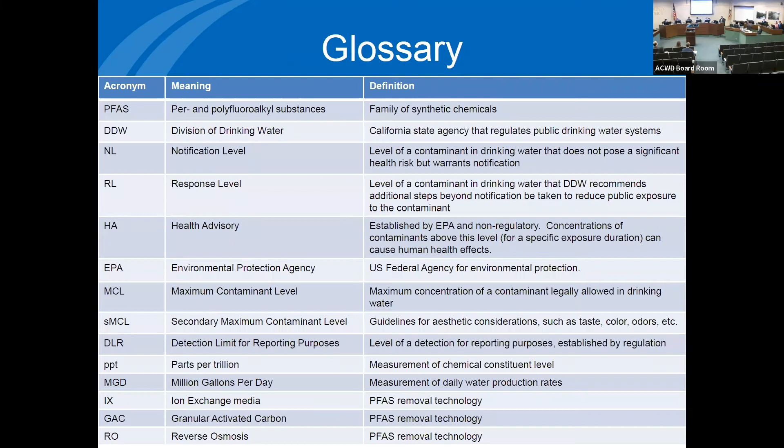Just real quick, I want to review what we have hoped to achieve tonight and some of the objectives of this presentation and the workshop. First, we want to develop an understanding of how PFAS currently affects our operations at ACWD. Then, really key to this discussion, based on potential regulations, how PFAS may affect us in the future, which is what we're trying to anticipate and plan for. We want to share various health-based standards and what it means to exceed those standards and what the risks are going forward, so we can understand both sides of the equation. What staff's approach is in trying to minimize these risks. And finally, lay out a path forward and the next steps for the project. So that's what we hope to achieve.

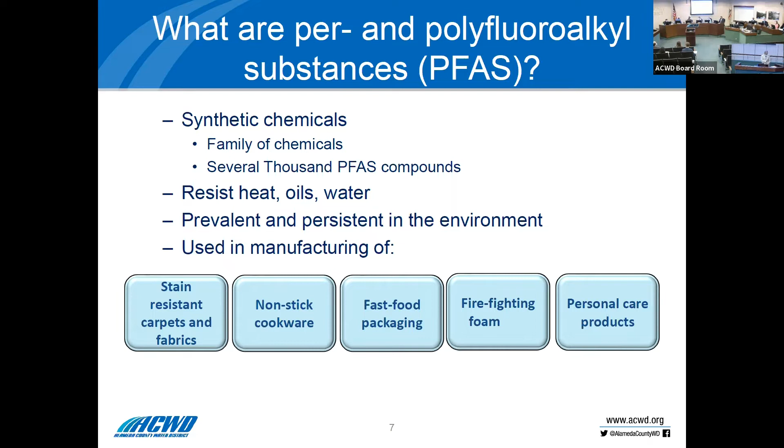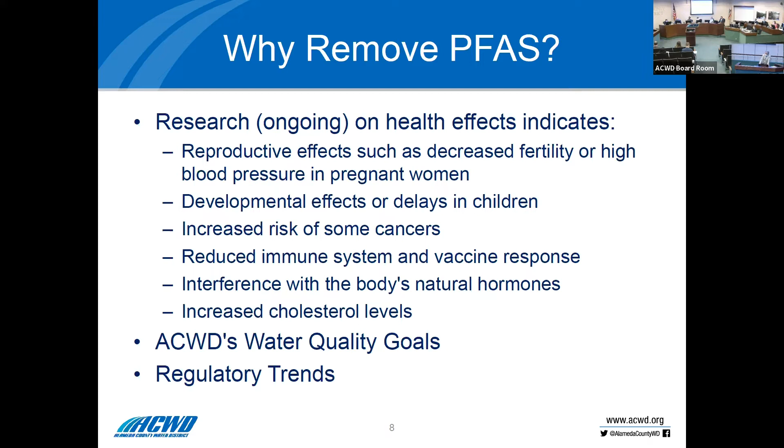The district's mission is to provide a reliable source of high quality drinking water at a reasonable price to our customers. And that includes providing water with contaminant levels below levels which may pose a significant health risk. So it's not only MCL, but anything that has a potential health risk, we prefer not to exceed those.

Our district strategic goal that was laid out, 1.2, is to continue to meet water quality standards 100% of the time. And we meet and surpass all primary and secondary water quality standards. Now, the primary standards are health-based, MCLs in this case. The secondary standards are aesthetic and include odor, taste, total dissolved solids, etc. And we meet all regulatory treatment requirements for treatment and distribution of water at all times.

And the blending facility, which is the focus of our discussion this evening, mostly, is we meet the hardness target of 150 ppm because it's groundwater blended with purchased San Francisco water. So as you can see, we have been carrying forward this mission statement all along with the quality of water we have delivered to our customers.

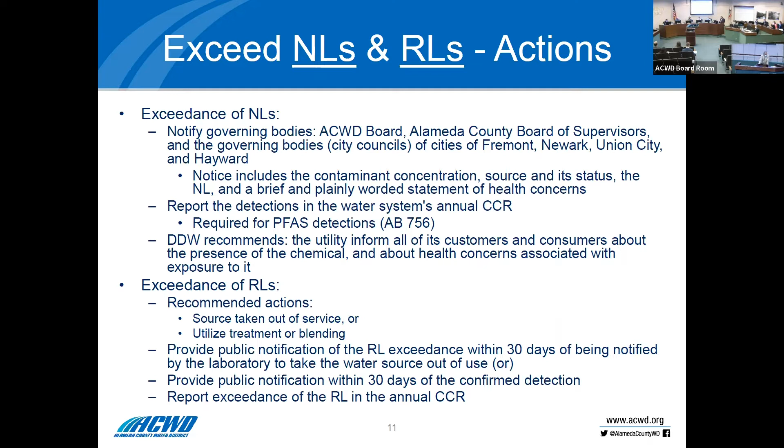So these are the two terms, because currently the PFAS chemicals, in their evolution toward establishing MCLs, these two are the thresholds that have been set by the Division of Drinking Water for 3 PFAS compounds, which are the most prevalent and have been known to have the most detections. And there is a fourth one, PFHxS, which we will also talk about tonight, because the Division of Drinking Water had a discussion yesterday, but Mr. Wickham will talk more about that. But we will also go into the fourth PFAS chemical. Next slide, please.

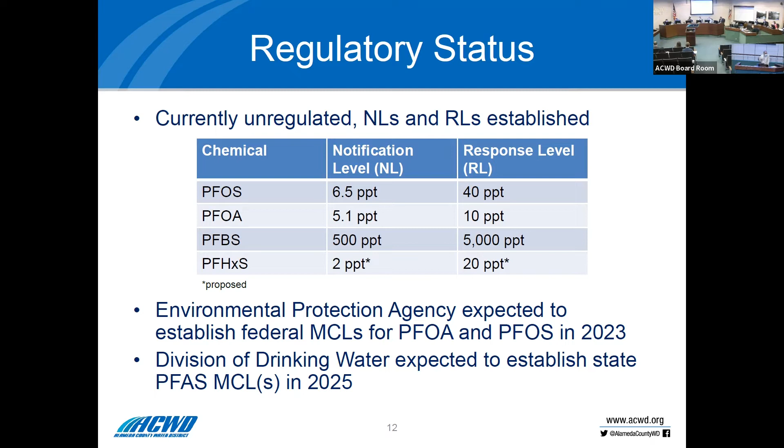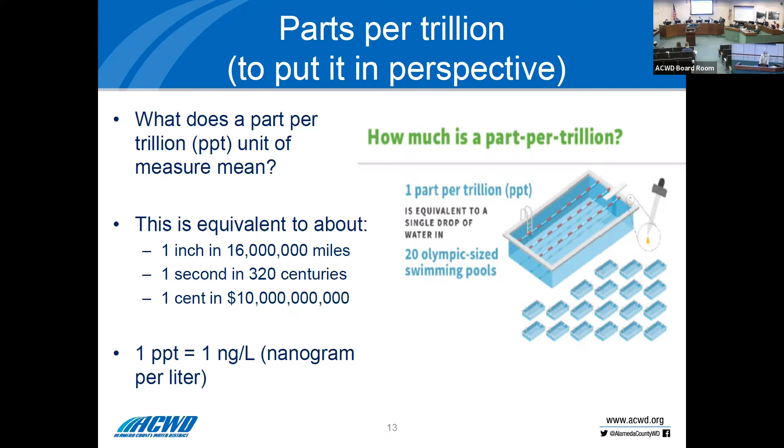But the toxicity studies have demonstrated that even at those low concentrations, like I showed in the previous slides, there are health effects. And that's why, based on those studies, we get these very low numbers. So the takeaway is there are health concerns for these PFAS compounds, the four that have been widely detected, even at very low concentrations. Next slide, please.

With regards to our monitoring program, which I've covered before, I'll just breeze through this. In 2020, the district embarked on a voluntary monitoring program. With the whole attention on PFAS, the Division of Drinking Water had issued monitoring orders for several utilities, both drinking water and wastewater treatment plants. ACWD did not get any monitoring orders, but nevertheless, in light of our mission statement and to be sure that the water we serve is of the highest quality, we began a voluntary monitoring program for PFAS in June 2020, and we've continued it since on a quarterly basis.

Samples are collected at all source wells, the Mowry and the PT well fields, which feed the blender. We also sample the desal supply wells and purchased SFPUC water. Because of our blending facility, we blend groundwater with purchased water, so we want to know what's in the other sources that we purchase. And upon blending and treatment, what's of ultimate importance is what we serve our customers, the distribution system entry points. We also collected samples at our surface water treatment plant, both raw water and finished water.

And every quarter we've been publishing the results on our website, in addition to all the PFAS information that's there for the customer. The good news is, for all the quarters we have sampled, we have always maintained all detections at entry points, what we're serving the customer, below the notification levels. But since there's no treatment yet, that was done by implementing operational strategies. Mr. Wickham will talk more about the operational strategies and the blender production capacities in later slides.

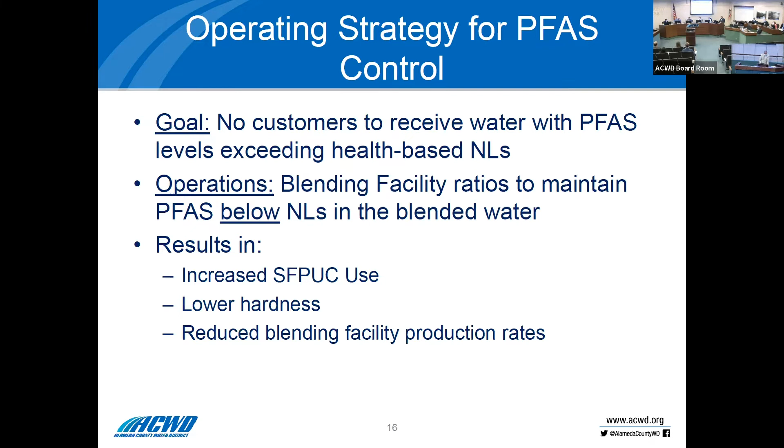With that, that's my section on the background of PFAS and why we are monitoring and what are the issues. If there are any questions, we could take them, or I will turn it over to Mr. Wickham. Questions, members of the board?

Question I have, you had a chart which showed where we have identified PFAS in our system. It showed, oh, we can pull up the chart if you could. It showed non-detect in the Mowry well field. But we did have PFAS in the, oh, sorry. Can you go to the slide? Yes, here we are. So in Mowry 2, non-detect. Mowry, the other wells, we found some. Right. So we have at least one well where there's non-detect. Yes, and thank you, Director Weed.

So if you look at Mowry 1, 3, 4, 6, 7, 8, 9, they are all not screened in the deep aquifer. Mowry 2 is our only well that's screened in the deep aquifer. The good news here is the PFAS, by whatever mechanism, hasn't yet reached the deep aquifer. That's why Mowry 2 has been non-detect. I'd be interested to see a graphic map of where these are located and the concentrations we see in our groundwater basin or our well fields. And might there be other locations in our groundwater basin where there'd be non-detect, where merely relocating our wells would address the issue in the near term?

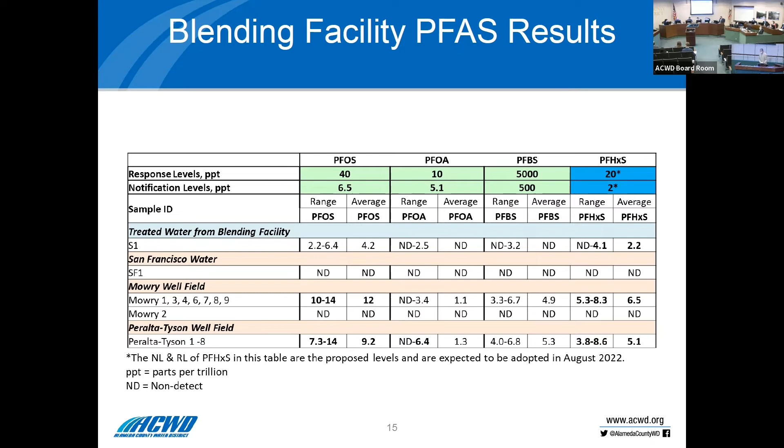Good evening, or good afternoon, actually. So my portion of the presentation will be a recap of the initial project that we came to the board with in January this year. We'll discuss our production impacts, anticipated regulatory activity coming up, a comparison of the regulatory timeline to the blender capacities, then also share how other agencies we've reached out to are responding to their PFAS issues. Advances.

So initially in January, we did come to the board with a project to help restore the blending facility offset production. And that was to identify an interim PFAS treatment system that would treat up to 6 million gallons a day for PFAS removal at the blending facility, and design and do an analysis for the potential implementation by summer of 2023 to restore capacity if feasible.

So the project approach was an accelerated approach to restore production and meet the timeline. And so we did pursue a parallel path. We conducted the water quality analysis portion of the study basically in parallel with some of the design components for the long lead time items like the pressure vessels. And to support that project, the board authorized an agreement with Trussell Technologies for the PFAS study at the groundwater facilities. And then next slide.

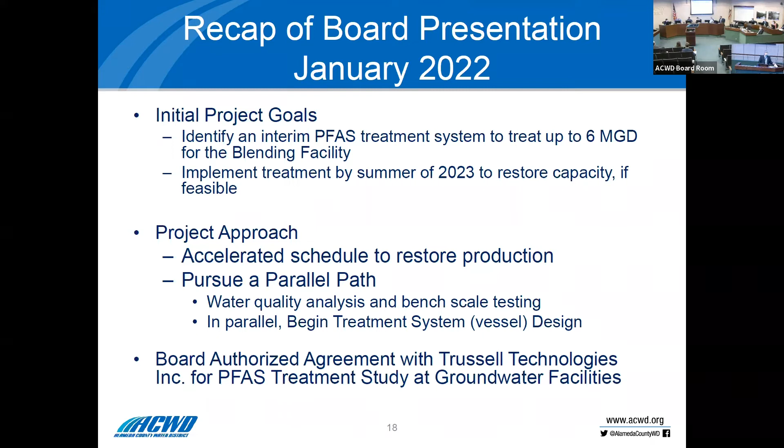Perfect. So some of the developments since we came in January: again, that 6 MGD was basically to help us operate and maintain below notification levels. And the initial goal was to have it installed and in operation before MCLs were in effect, to essentially buy the district whatever time it needed to make the larger decisions it might need to make. Since January of 2022, there's been a few significant developments.

The largest one is that the Division of Drinking Water has proposed, and they heard the informational item just yesterday at their board meeting, and there was no commentary on it, so our assumption is that this will be adopted, a 2 part per trillion notification level for the PFAS compound PFHxS, and the corresponding response level of 20 parts per trillion. That notification level is a bit of a challenge for us.

So remember from Mr. Sampath's slide with our monitoring results, our average concentration in our groundwater basins due to the blending facility was about twice the notification level for PFOS. They are 3 to 4 times this new proposed notification level for PFHxS. So that does have an impact on us. But additionally, it may have some impact on our desalination facility as well due to the levels in our Cedar 2 well, but that's outside of the scope of this project.

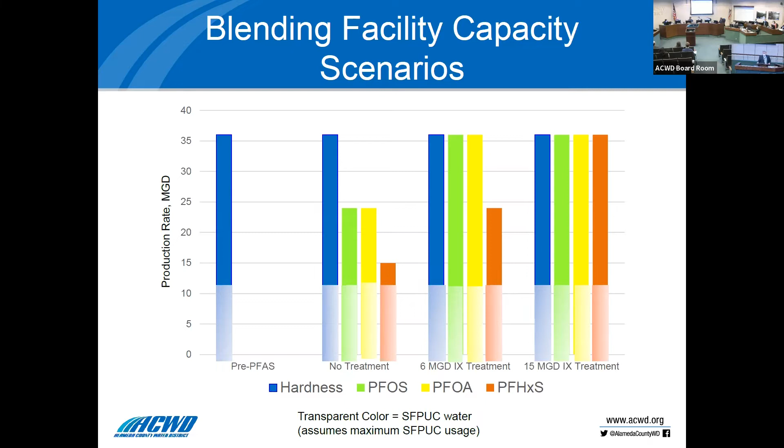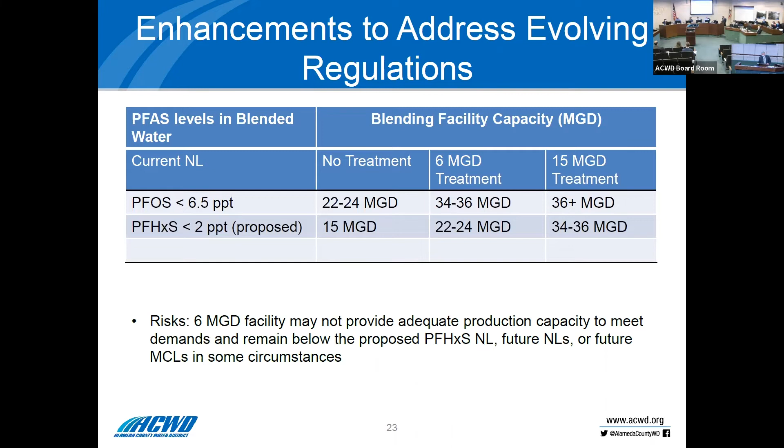All right, so the regulatory capacities and the timelines. So again, August 2019 is when the notification levels were lowered for PFOS and PFOA. Before our discovery and monitoring for PFAS, we were operating the blending facility up to about 34 to 36 MGD. I guess I'll just go across the top. So then in this August, so actually yesterday, PFHxS notification level of 2 parts per trillion likely to be established. We do not yet know what month that will actually be published.

And then in fall 2023, we're expecting the EPA to have final MCLs for PFOS and PFOA. And then in 2025, when state MCLs are expected. We have PFOA and PFOS up there, but our recent communication with them indicates that they're looking at regulating PFAS by class. So a lot of this is going to be dependent probably on what they discover during their studies, looking for correlations in the analytical methods to be able to test for it by those groups.

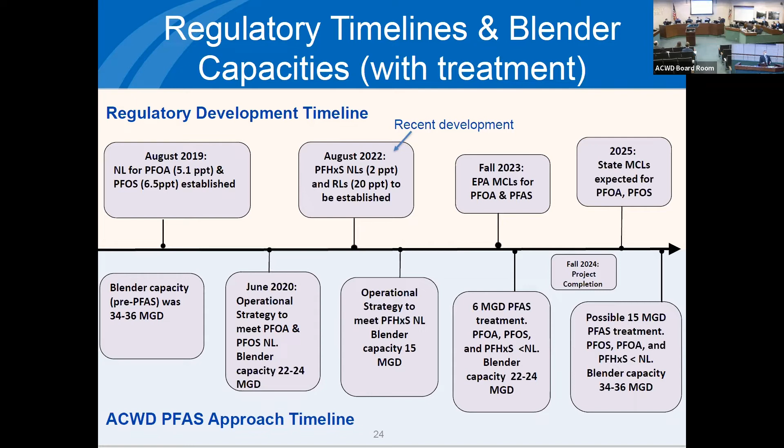And then along the bottom, again, in June 2020, we implemented our operational strategy to remain below notification levels for PFOS and PFOA that limited our capacity to about 22 to 24 MGD. When this new notification level is established, to remain below it, our blending facility capacity will be approximately 15 MGD. If 6 MGD of treatment is constructed, it brings us back up to 22 to 24, remaining below the notification level. And potentially in the future, if we expand that treatment, then our capacity of the blender will increase.

And then what are other agencies doing? So we did reach out to several agencies, and each agency developed their approach to PFAS wholly dependent, I guess, on their individual situation. So many agencies had PFAS levels that were higher than ours, like above the response level for some of their wells. We are fortunate, or at least somewhat unique, in that our PFAS levels are low. They're below the response level and just a little above the notification levels. And we have the capacity to blend to remain below. So we're kind of different from many agencies.

So again, many agencies had higher levels than us, and that pushed them towards treatment. Other agencies like ours had options which let them provide water below the NLs to their customers. Several agencies didn't have those options prior to installation of treatment and have started down the path of designing and/or installing PFAS treatment. And they're currently delivering water with PFAS levels above the notification level and below the response levels, essentially out of necessity. Water quality and operational managers have spoken with other agencies. All of them have indicated their treatment goals for water delivered to their customers is below detection or below the notification levels.

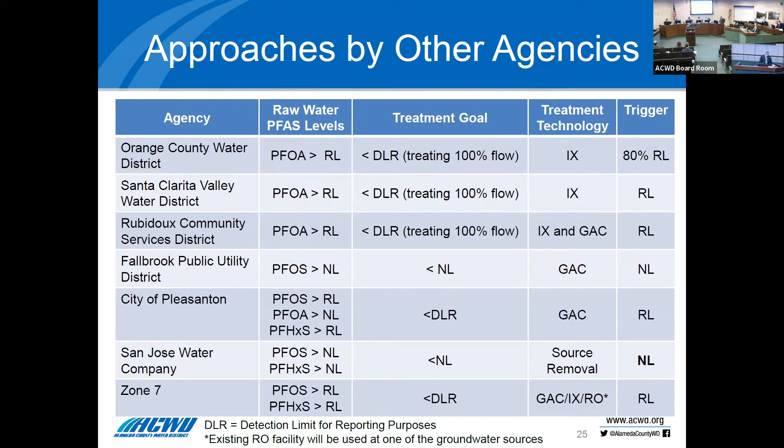So with that, that's the end of my section, so I'll pause for questions. Are there any comments by other members of staff on this? And bring it to the board. Are there questions on the part of the board? Director Gunther and I already had our questions answered a couple of weeks ago.

Yeah. My questions relate to, first of all, what is our current detection limit and where do we see that going? So the current detection limit we can detect is 2 parts per trillion. The question of where do we see that going? I'm going to look to Ms. Darby from Trussell. Do you have any indication of that going?

Yeah. So the detection limit is a little bit lower than 2, but the lab reporting limit, the minimum limit that they can reliably detect, is 2 parts per trillion. This changed about 5 years or so ago from a higher limit, so it's possible that the methods will improve to get lower detection limits in the future. But I haven't seen movement in that too rapidly. So we have the ability to do a 2 ppt detection at this time? Yes, sir, we do.

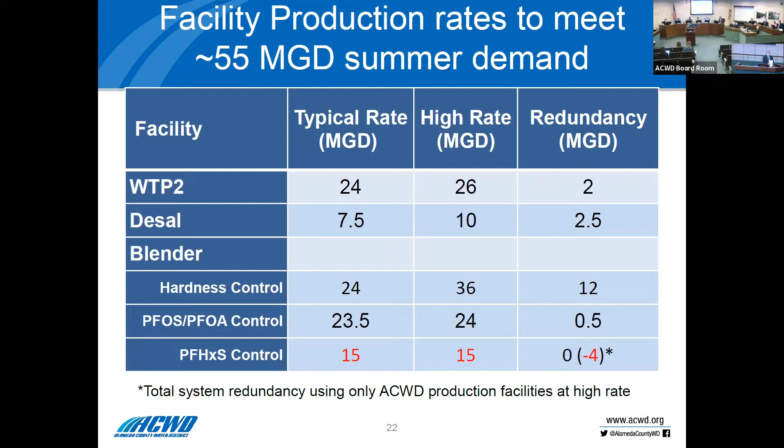Yeah. Just as a process check, where are we in the presentation for tonight? I think we've got a ways to go. We're about halfway, sir. On section 204, around halfway. All right, thank you. You're welcome. So with that, I will turn it over to Dr. Pexon and Ms. Darby from Trussell Technologies.

Good afternoon. In this next section, we're going to talk about the water quality evaluation and its impact on the selection of technologies for treating this water to remove PFAS. Okay, thanks. So on this next slide, what we're looking at here is your existing groundwater quality. This is part of a table that we put together from a tech memo to review and summarize your water quality data. What this table is focusing on is parameters that could impact the performance of some of your treatment options like GAC, granular activated carbon, and ion exchange.

What we're seeing in this table is that we're generally finding a lot of these constituents at low levels that we think would not impact the media-based technologies like GAC and IX. You can imagine other charged species like nitrate and sulfate could also potentially bind to these resins and compete with the PFAS compounds, but we're finding them at low concentrations. I wanted to point out as well that the TOC, total organic carbon, is gratefully at a low level as well, lower than the levels that we see in Southern California, which also bodes well for these media-based technologies.

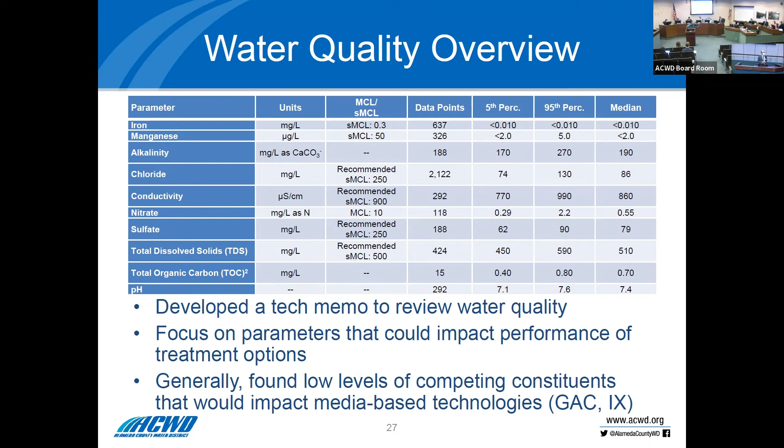So if we go to the next slide, those are the water quality constituents that could impact treatment. Here's some of the data that Mr. Sampath and Mr. Wickham talked about from your monitoring program. We're focusing now on the PFAS compounds. Remember, you looked at 18 different PFAS compounds through that testing. 7 of those compounds showed up above the detection limit, and that's what we're showing in this table. Just to recap, the ones that already have established notification levels and response levels are 3 of them: PFOA, PFOS, and PFBS.

There's a 4th, PFHxS, that has a proposed NL and RL. And what we're highlighting here in the red bars is that 2 of these constituents that have NLs and RLs were detected above the notification level. So PFHxS and PFOS are detected above this. And so if you want to continue with this goal of producing a water that's below the notification level, then some form of treatment is going to be required.

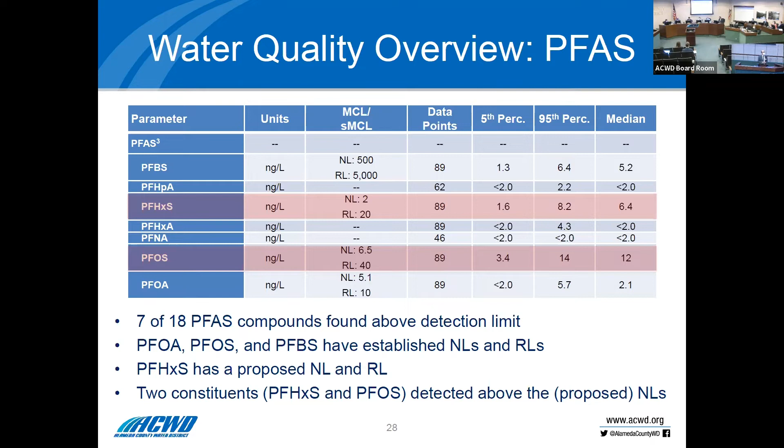So what are our options? On the next slide, as Mr. Wickham said before, there's 3 technologies that are identified as best available technologies by the EPA: GAC, IX, and RO. Of these, the first 2, GAC and IX, are more prone to be impacted by site-specific conditions of your water. RO has been shown to provide really excellent protection kind of regardless of water quality.

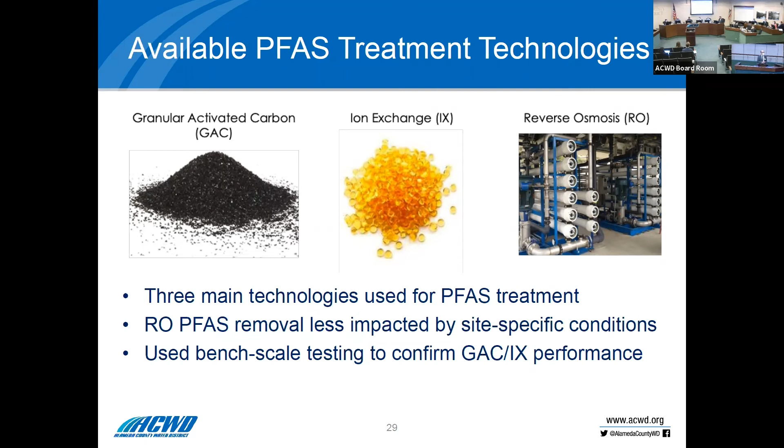And so one thing that we can do to understand how well these technologies would work for your specific water is to do some bench scale testing to confirm that they're actually going to perform well and be good choices for you. And so on the next slide, that bench scale testing, what that actually is, is this rapid small scale column testing, or RSSCT.

So when we think about your full scale operations, you have these pressure vessels that get loaded with media, and you put water over them over a long time period, perhaps a year it might take for the constituent. It gets adsorbed and eventually it fills up the whole media bed and then it comes out the backside. And so if you want to compare the performance of these different media at full scale, it would take a long time to do this. So that's not a feasible option for a lot of people who need to make some decisions quickly.

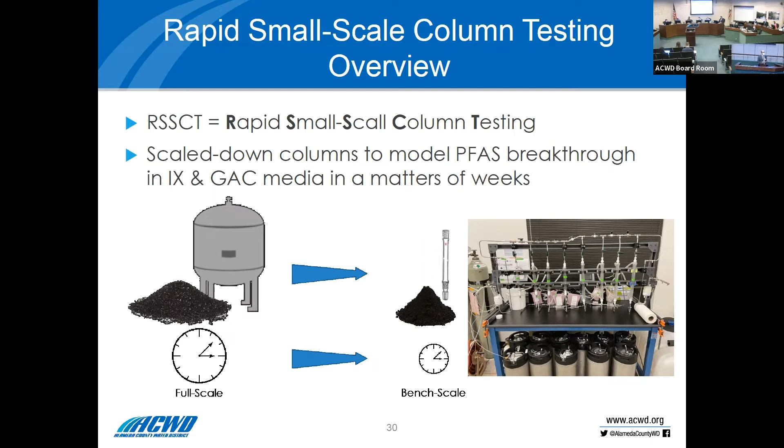So instead what we use are these scaled down columns, just these glass columns that I'm showing in the bottom right. You load them with exactly the same media that you would use at full scale. And then we put your specific water quality, your groundwater, on top of these columns. And what they can do is provide us information in a matter of weeks rather than years regarding the performance of these different media. So in the next slide, I'm going to pass to my colleague, Ms. Darby, to walk through some of the findings of this testing.

Okay, thank you. So here I'm going to show the results from the RSSCT testing. We tested 3 ion exchange resins and 2 GAC media that were all media that performed well at other testing in California and are NSF 61 certified. So I'm going to orient you a little bit to this plot. So this is a breakthrough curve. And so on the left side, the y-axis is the concentration of the PFAS compound. We measured all 18 PFAS compounds that are in EPA 537.1. 7 of these were detected in the groundwater, and then all of them were removed to levels below the detection limit by using the GAC or ion exchange resin.

And so the concentration that we measured in the effluent from each of the columns is shown on that y-axis. Then on the x-axis is the number of bed volumes that have been treated. A bed volume is the amount of volume of media in the column. So this is typically how you measure the throughput for a column, is how many bed volumes have been treated. These bed volumes on this small scale RSSCT column are directly transferable to a full scale column. And you can do a conversion of how many days of full scale operation this would be by multiplying by the empty bed contact time. So you can see that equivalent days of full scale operation on the top x-axis.

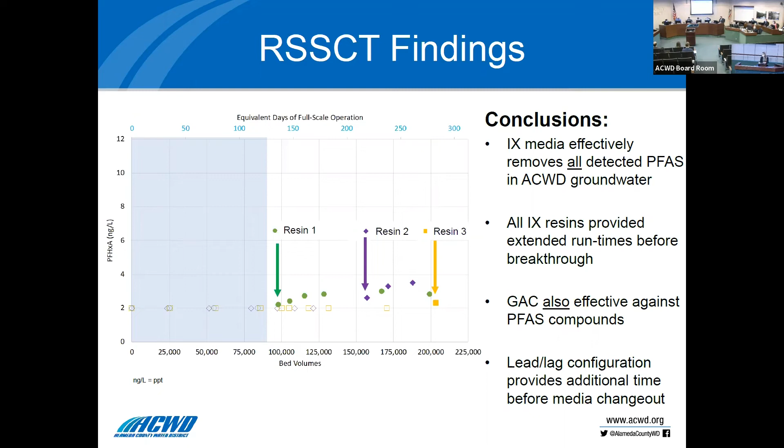So using the results from this rapid small scale column testing, we did an alternatives evaluation comparing ion exchange, GAC, and RO. We developed a preliminary design for each of these 3 alternatives, a layout and a cost estimate, and then evaluated these 3 alternatives based on these 6 criteria: cost, operability and safety, aesthetics, future proofing, feasibility for long-term expansion, and timeline. And based on this evaluation, we decided with ACWD that ion exchange was going to be the preferred alternative for this interim treatment system.

And that is because ion exchange had the lowest cost per acre foot of the 3 technologies, with a cost of around $200 to $300 per acre foot. In terms of operability and safety, ion exchange is relatively easy to operate and maintain with no continuous waste stream. Unlike RO, you're not generating a brine. Instead, the PFAS is adsorbing to the resin, and after about a year and a half, when your media has become exhausted, the vendor comes out and replaces that media.

There's also no regular chemical input for ion exchange. It has a high turndown ratio, so a high ratio of the high flow rate to the low flow rate, which gives flexibility for operations. And it has a minimal flush period when you start up a train after exchanging the media every 1.5 years.

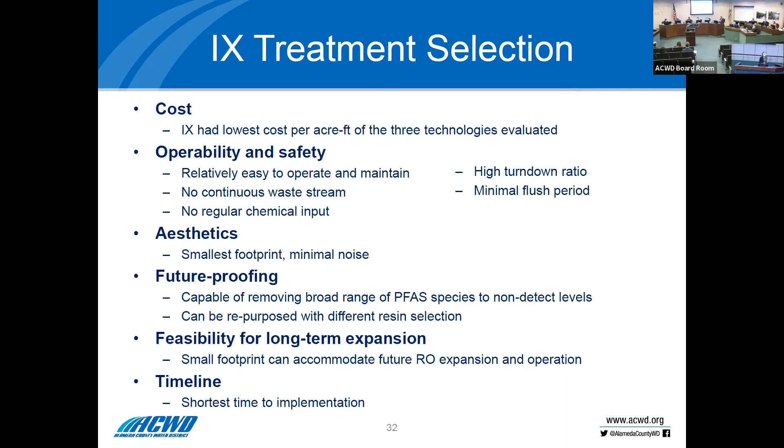In terms of feasibility for goals to put in future RO, the ion exchange system has a small footprint, so it allows that space for a future RO system for hardness removal. And in terms of timeline, of the 3 alternatives looked at, ion exchange, GAC, and RO, ion exchange has the shortest timeline for implementation. So based on these reasons, the district has decided that an ion exchange system meets these goals best. And on the next slide, I'm going to talk about some of the environmental considerations of this system.

So while ion exchange has been shown to be effective at removing PFAS to non-detect levels in the water, we want to think about the environmental considerations of this treatment as well. So one of the things to think about is the disposal of the waste media. Every year and a half or so, you have to replace the media that has absorbed the PFAS with a fresh bed of resin. To do this, the vendor is going to come out and remove that media and replace it with a fresh bed of resin. And then they will take that media away and dispose of it safely.

There's a few different disposal options. You can do incineration or landfill. We recommend going with a hazardous waste landfill because of the potential that PFAS will in the future be categorized as a hazardous waste. This option is going to have the least risk for the district. Okay, so that's the spent media.

Then there's also the liquid waste that we have to think about. There really isn't a continuous waste stream for this system. The only time that we're disposing of a liquid waste is when we're first starting up that resin after we put in a new bed. So every year and a half, when we put in that new bed, we will need to flush it. And it's just for a few bed volumes because the vendor will already flush it for about 20 to 40 bed volumes to make sure that any potential contaminants like nitrosamines are removed and to stabilize the chloride and pH. So once we get it to the field, flushing it is really mostly precautionary.

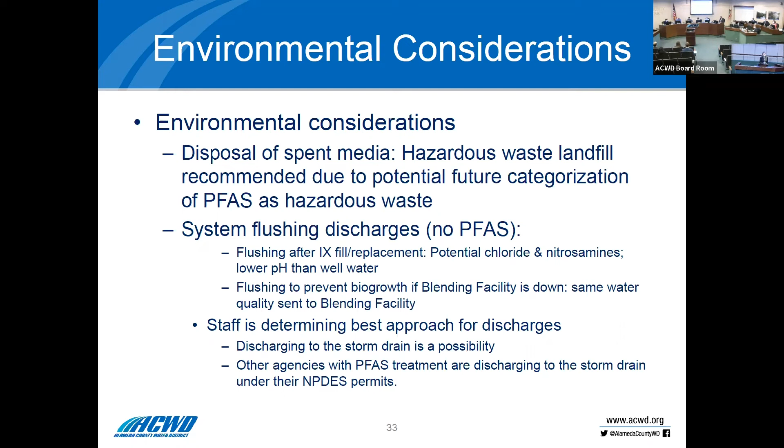Okay, so those are the environmental considerations. It really isn't the same problems that we encounter with RO where we have that continuous waste stream. This is more managed with what vendors do of disposal of the spent media. Okay, so I think that is the end of this section, so I'll pause for questions. Thank you. Any comments from staff? Not from the board. Do any members of the board have a question or comment?

Question I have, did you develop a cost matrix for the options on capital and operation costs for the other alternatives? Yeah, so we developed a class 5 cost estimate for each of the 3 alternatives. So a class 5 cost estimate does have an uncertainty range of about -50% to +100%. But based on that estimate, GAC and IX are both similar cost of about $200 to $300 per acre foot, while RO was about 3 times higher, both in terms of capital cost and operating cost. And so around $600 to $900 per acre foot.

That chart would be helpful, just so we have it for our records. Yeah, it's here in the presentation a little bit later. Oh, I'm sorry. Okay. Next, on our media, the ion exchange resin. Are they proprietary resins or are they on the general market? They are proprietary resins. There are different vendors though that make these. So you will be able to do a competitive bid. There's multiple vendors that make these ion exchange resins that are effective at PFAS removal.

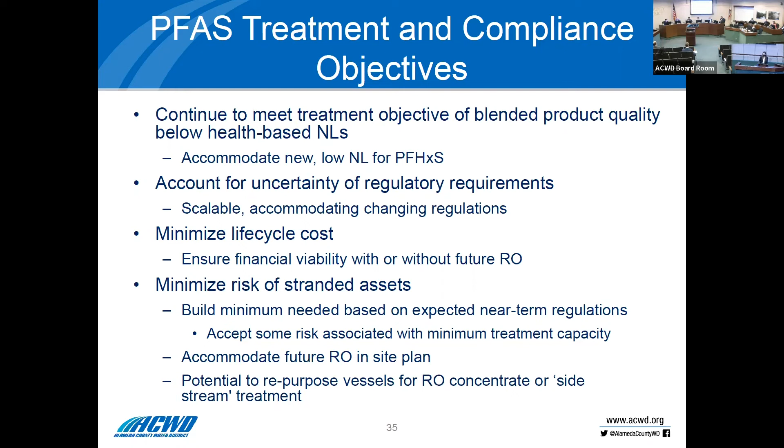An IX treatment facility will provide a cost-effective solution to the district's PFAS treatment and compliance objectives. We will design a 15 MGD facility, but we will have the flexibility to start with constructing just 6 MGD initially, and we can expand that as needed based on future regulations. This phased approach minimizes the risk of stranded assets, and we can accelerate construction of the 6 MGD facility, expanding as needed. This phased approach will also help us with near-term compliance of the PFAS regulations while working on a potential future RO facility, which would take significantly longer to implement.

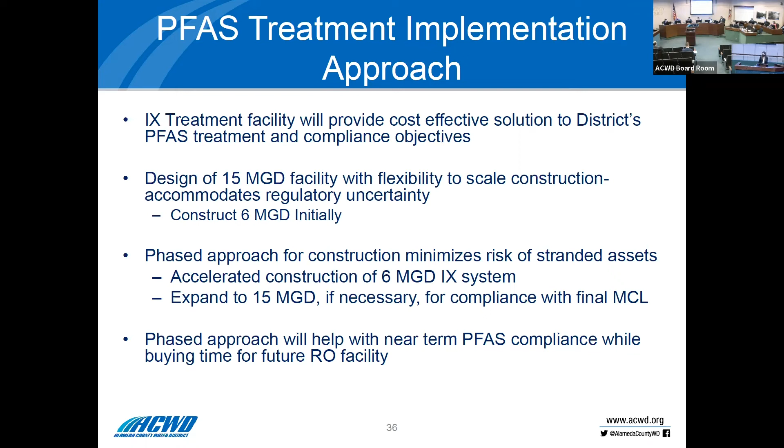The treatment system schematic is shown on this slide. The project would treat water from both the PT and Mowry well fields. Any water produced by the wells in excess of what needs to be treated for PFAS to meet production goals of the blending facility can bypass treatment. Water to be treated will first pass through feed pumps with variable frequency drives. These will control for the flow as well as boost the pressure as needed to overcome the head loss through the treatment system. Next, the water will pass through cartridge filters for particulate removal. The ion exchange media cannot be backwashed, so this is why we need to remove the particulate matter before the water enters the ion exchange vessels.

Next, the water will go through the ion exchange vessels. The number of trains varies with the capacity of the system. 7 trains would be needed for 15 MGD, 3 would be needed for 6 MGD. Each train will have 2 vessels in a lead-lag configuration. Finally, the water will then go through booster pumps to be boosted back up to distribution system pressure as needed, or it will recombine with any bypass water and enter the blending facility.

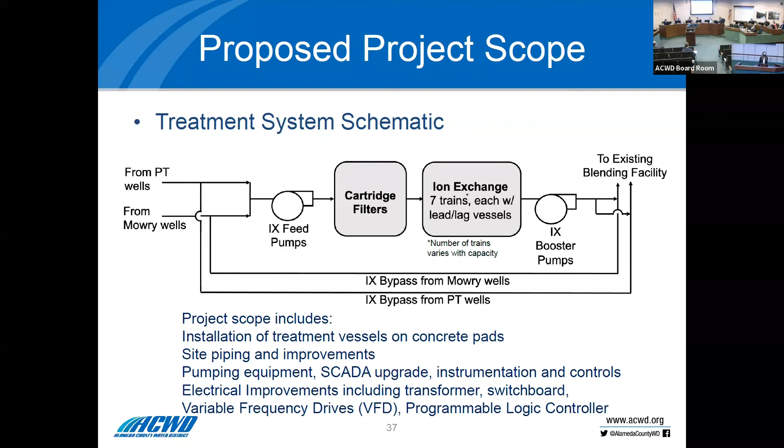Just a note here as well, in addition to the number of trains, all of the other elements would have to be scaled depending on the size of the project, the number of pumps, the number of cartridge filters, etc. In addition to what's shown in the schematic, the project scope includes installation of concrete pads, site piping and improvements, SCADA upgrade, instrumentation and controls, and electrical improvements.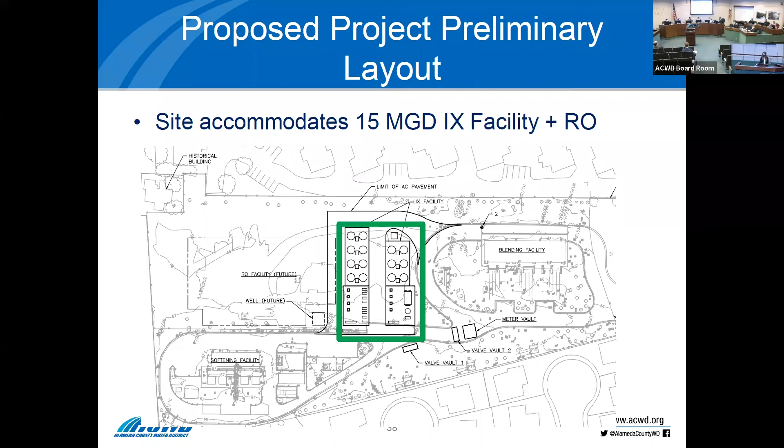Here we show the preliminary layout of the proposed project. There is room for the proposed project on the existing blending facility property. We have outlined in green here the footprint of a 15 MGD facility. See, it fits, with our existing blending facility shown there to the right. And there is still room, even with the 15 MGD facility, for an RO facility on site, now outlined here in green to the left.

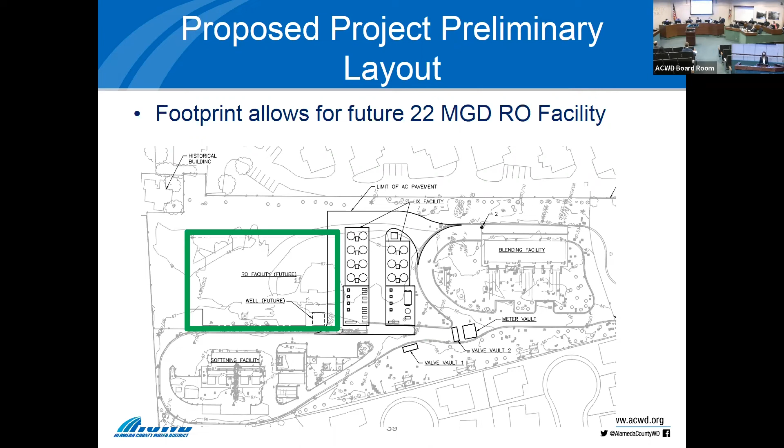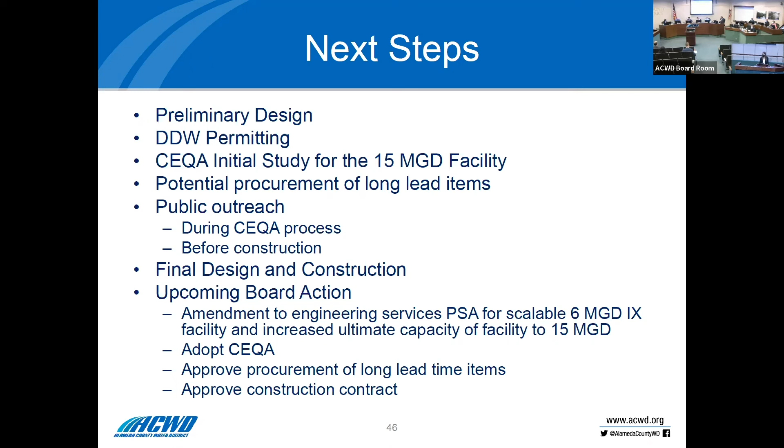So that concludes tonight's presentation. Thank you all for your attention. We went through what PFAS are and regulatory issues around PFAS, the district's water quality and operations, our alternatives evaluation, and our proposed project. We would now like to open it up if there are any questions, comments or discussion. Questions by staff?

If not, let me ask the board and then we'll take it to the public. Director Sethy? I've got two quick comments. Can you go back to slide 43 and 44? Let's see, one earlier slide. And let's go one. Okay, it's slide 40. Slide 41.

So I would just ask that as we take a look at the energy costs on a system like this, and we're not even forecasting the rate increases by PG&E in here, that this may be a really good opportunity to take a look at the Bloom fuel cells, because we have the footprint there. And it might be just a good opportunity to see if it would make sense. I doubt that solar would on that site, but Bloom has a whole new commercial program that just went into effect this last year.

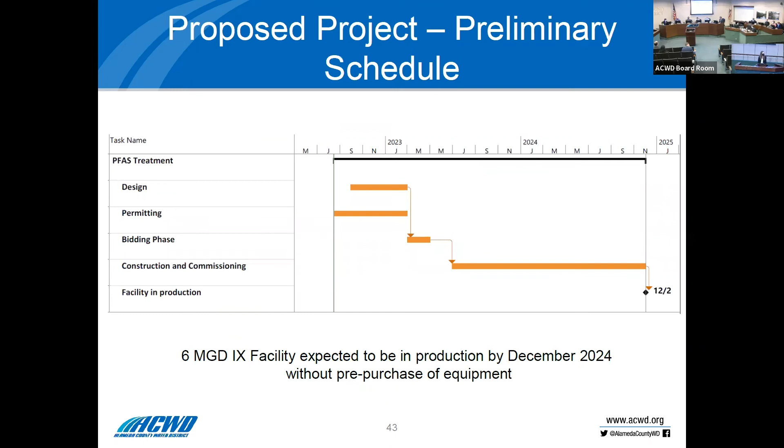Next one. There was something here. Oh, right here. How many of these components are coming from overseas suppliers, if any? What's domestically produced? Yeah, so the vessels can be produced in the US. I'm not sure where the other components are coming from. But the vessels are a US manufacturer plus the resins? So some of the resin vendors are in the US and others are not.

And have you factored in the backup supplies that we would need just on a contingency basis? Factored in the cost of that? So for the resins, there's two factors here. One is they are changed out only every year and a half, and there's monitoring ports throughout the vessels. So you'll get some heads up of when you're going to need to replace the resin. And that does provide sufficient time for contacting the vendor and getting some more shipment of resin. Right now, the lead time for resin is not long, on the order of a few months. And that's for a new contract.

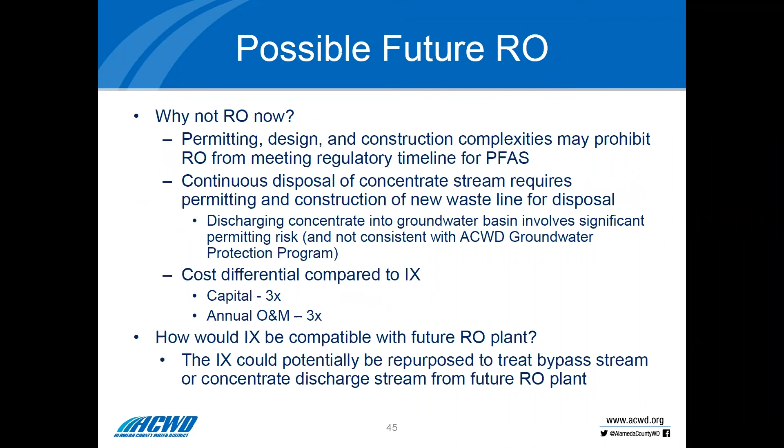Yes, so maybe we'll start with Director Sethy's page 41. I just wanted to make sure I understand the information presented about the energy. The table entry is average annual energy demand, but the unit's horsepower. Horsepower is a unit of power, not energy. I assume what was intended to be published there for the 6 MGD system is 90 kilowatts, converting horsepower at 746 watts, and that the average annual energy consumption therefore will be 745 megawatt hours. So I just wanted to confirm that.

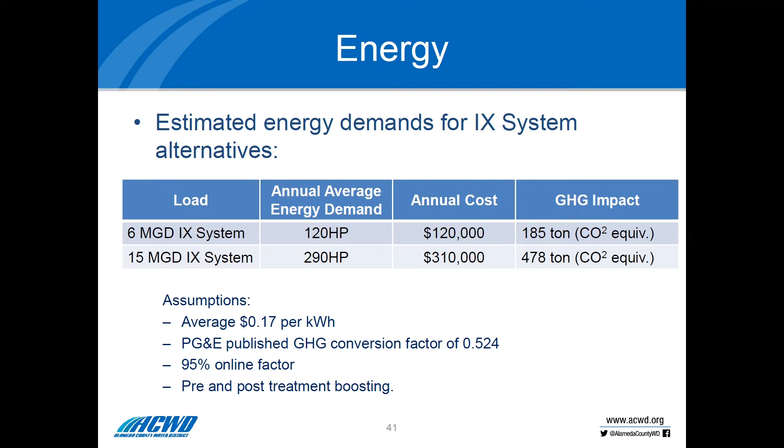And then to Director Huang's comment about the cost, if you go back up one slide to slide 40, looking at the table, is it correct to assume that the marginal cost of producing water is roughly $900,000 to produce 6 million gallons a day for 1 year at 95% duty cycle? If that's the case, I believe 6 million gallons a day at 95% duty cycle or duty factor is 6,385 acre feet, which works out to be about $133 per acre foot.

If I add the notional, and I say notional, cost of groundwater at $500 an acre foot, which is the groundwater replenishment rate in effect right now, that means the marginal cost of producing an acre foot of water from this facility is $633, which is less than 1/3 the cost of the $2,100 an acre foot that we are paying SFPUC for the quote unquote low PFAS water. So I just wanted to confirm that.

And the last question or comment I have, I think, goes to Director Gunther's concern. This was actually part 2 of my previous question, which we didn't get to: are there any technologies to regenerate the ion exchange? In the case of domestic water softening, which is a cation exchange, as I believe the respondent alluded to, one would regenerate it in situ with a strong solution of the desired cation. So in domestic water softening, you are substituting sodium for calcium and magnesium, and when the ion exchange resin is spent, you would basically soak it in brine, sodium chloride, and regenerate it.

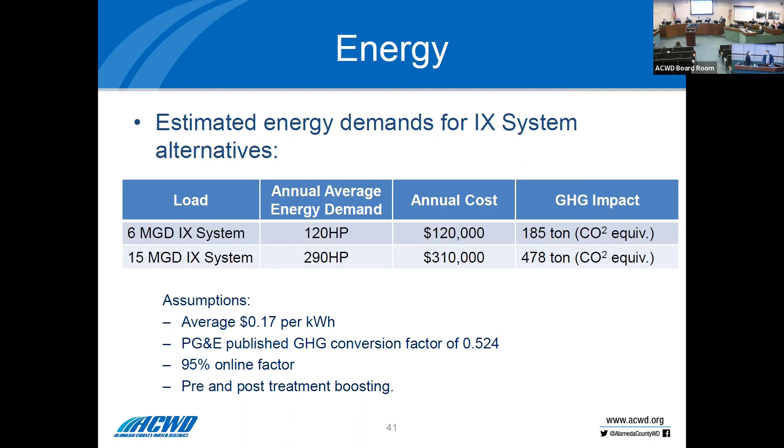And then we also provided there under the assumptions the online factor. So there's an online factor of 95% on top of that energy demand, and that will bring you out to that annual cost. So hopefully that helps explain the numbers you're seeing there. And then I'll turn it over to Ms. Derby to talk about the second 2 questions, which were the cost per acre foot, confirmation of that, and then a question about IX regeneration.

Thanks. So in terms of the cost per acre foot, the cost per acre foot for the added IX treatment is going to be a sum of the annual O&M cost. That includes maintenance, replacement of the resin, energy. And so that is this $900,000, which you then calculated was $133 per acre foot with a 95% online factor.

We then add that to taking this capital cost, assuming a 30-year loan and a 3% interest rate, to calculate an annual cost for that. And so we add those together, and that's where we got the $200 to $300 per acre foot. And so that's for the IX treatment, and this would be added on top of the rates for the blending facility.

The second question was about whether the IX resin can be regenerated offsite. Right now, there's no cost-effective way to regenerate it offsite. There may be in the future, but the difference between PFAS and hardness is that in order to be able to remove PFAS, which is present at the nanogram per liter, compared to other anions that are present in your solution at milligram per liter, then you have to have a much stronger bond between the resin and the